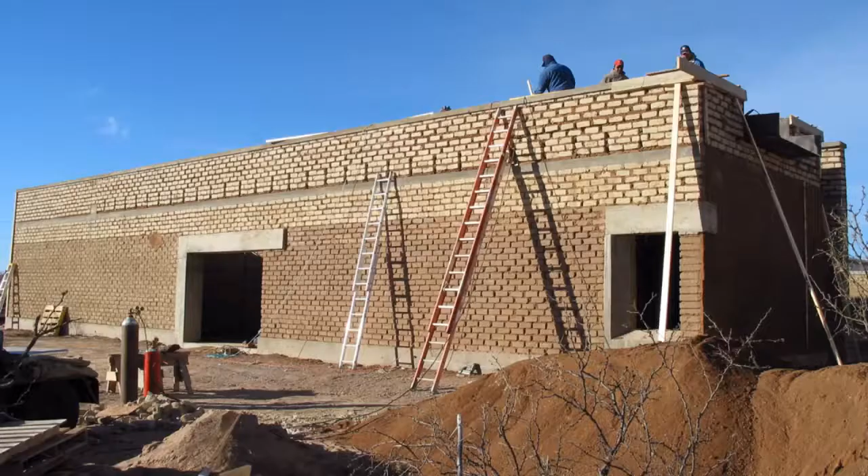For this house we made in Marfa, Texas, we employed these historic technologies and current building practices, weaving concrete and earth together, making architecture that takes building materials from New Mexico and from Mexico. The lower bricks are from New Mexico, the ones above from Ojinaga, Mexico, because they were lighter and less expensive, saving cost on the wall and not needing to bear such a structural load. Woven together so you can see the distinctions clearly between two building traditions, yet simultaneously unified.

Working in Marfa during that time, we also began to be exposed to the political conditions of working on the contemporary U.S.-Mexico border, a landscape that in many ways is a binary between the United States and Mexico, or Tejano and Anglo, or wealth and poverty.

We were approached to work on a project with two artists from Berlin, Elmgreen and Dragset, on a project that walked the line between all those juxtapositions and contrasts, called Prada Marfa. For us, that exposed another dimension of architectural possibility, one that is political.

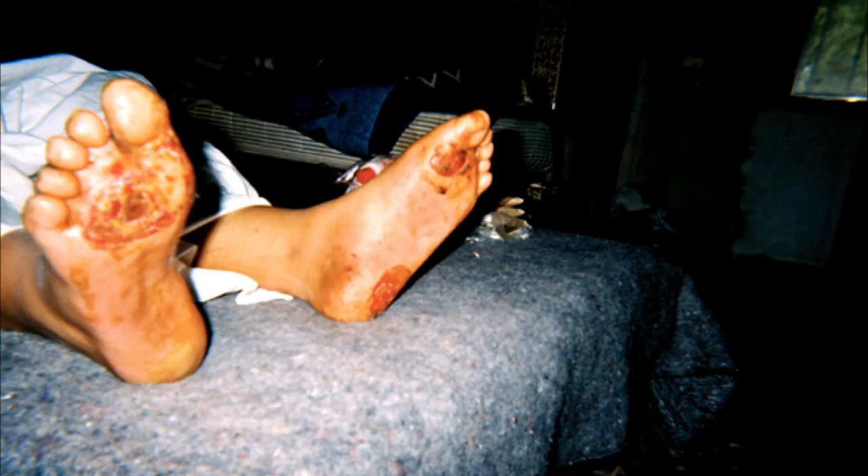What does it mean to build a building in a landscape, an architecture or installation that suggests a kind of venue recognized for selling some of the most expensive purses and shoes in the world, in a landscape where historic shoes were made out of the yucca plant, prevalent in the environment, in a context where people walk hundreds of miles until their shoes wear out, and have to stuff yucca in their shoes to keep going.

It's a project that draws from Andreas Gursky's photograph Prada as its facade. This is the building, Prada Marfa, built along a desolate road in the West Texas desert, holding the 2005 line of purses and shoes, not open to the public, but hermetically sealed as a kind of time capsule in the middle of the desert.

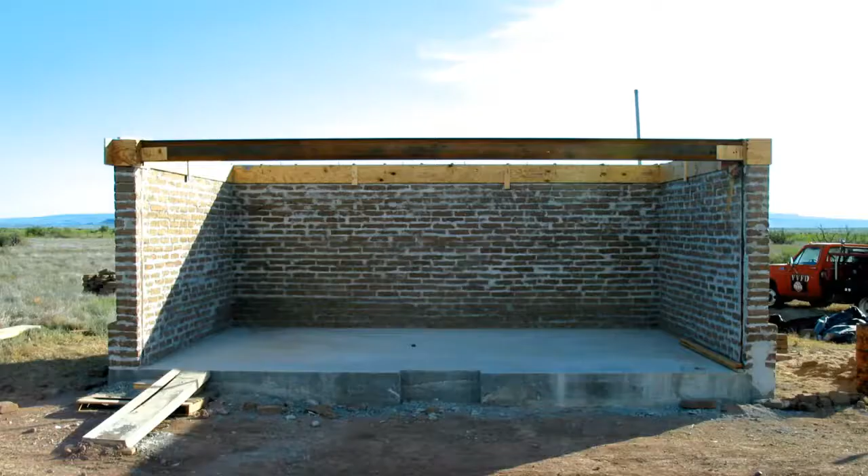But even in the construction of this building, we wanted to demonstrate these relationships and juxtapositions, because we felt this was a future object of archaeology, one that would be uncovered, and maybe archaeologists would discover within the building this tension between the very humble mud brick and cement mortar, and the dialogue between the two.

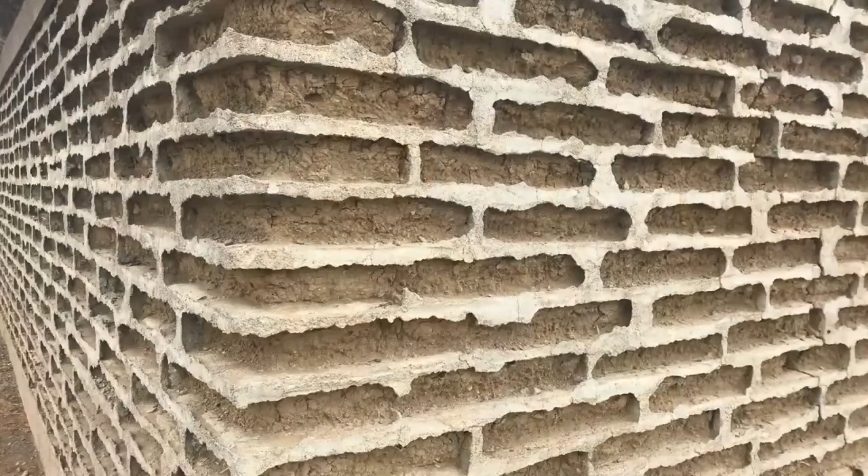The US military introduced this into the border because they were very accepting of the brick, but not so accepting of the mud mortar. You find that in the construction of the military forts built in Marfa as the base to protect the United States along the US-Mexico border, and later you see these same buildings housing Donald Judd's collection of minimalist work in Marfa.

So when Beyonce made this jump in front of Prada, it became the kind of signature thing you do in front of Prada Marfa if you ever visit there.

For me, the borderlands were both a context in which we found two things. That project was completed in 2005, and there was a heightening of security along the US-Mexico border at that time. In 2006, the Secure Fence Act was passed, which mandated 700 miles of wall between the United States and Mexico.

So what we found was these conditions of horror along the border, coupled simultaneously with conditions of humor. Horror stemming from the militarization of the border, from xenophobia, the struggles between poverty and immigration, and humor as a response to those hardships, and as a strategy to deal with the ridiculous nature of the border wall. This was what prompted our research and work on thinking about the conditions along the US-Mexico border and the construction of the wall.

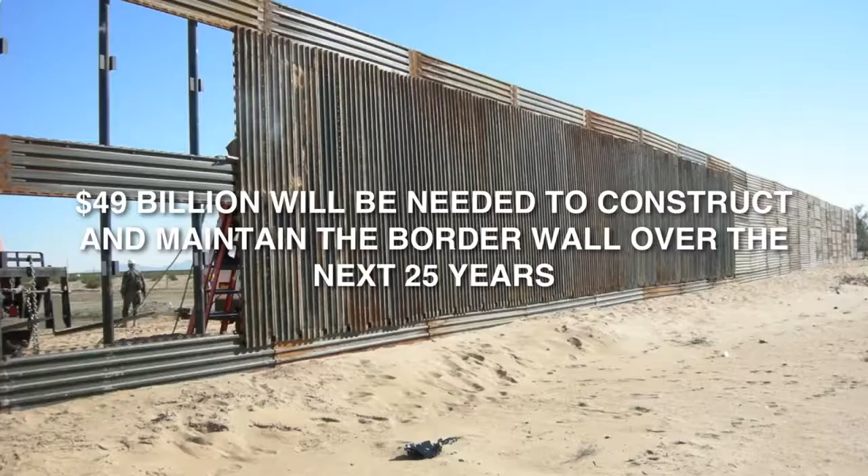In fact, this is one of the most expensive stretches of wall constructed over the dunes in California, called the floating fence. But $3.4 billion have been spent constructing this wall since 2006. And it's anticipated that $49 billion will be needed to construct and maintain this wall over the next 25 years.

Again, this is not Trump's wall, which he has only built a few feet of. This is the wall that was put in place by the Secure Fence Act by George Bush, and really the majority of which was constructed under the Obama administration.

I like to put that number, 49 billion, into an architectural context to think about what else that would buy. It could buy 300 Seattle public libraries, or 204 Disney concert halls, or 500 miles of the High Line. And put that into perspective when you think about the fact that there are 690 miles of wall built instead of 690 miles of High Line.

I don't mean to suggest that we should build a High Line there, but one could imagine the kind of cultural investment that would transform a region that is in need of infrastructure around water, education, social infrastructure.

In addition to that, since 1994, nearly 6,000 people have died trying to cross the border. And so the implications there are that the wall has pushed people further into the desert, and this is the outcome. Well, what does one do as an architect, and how does one participate?

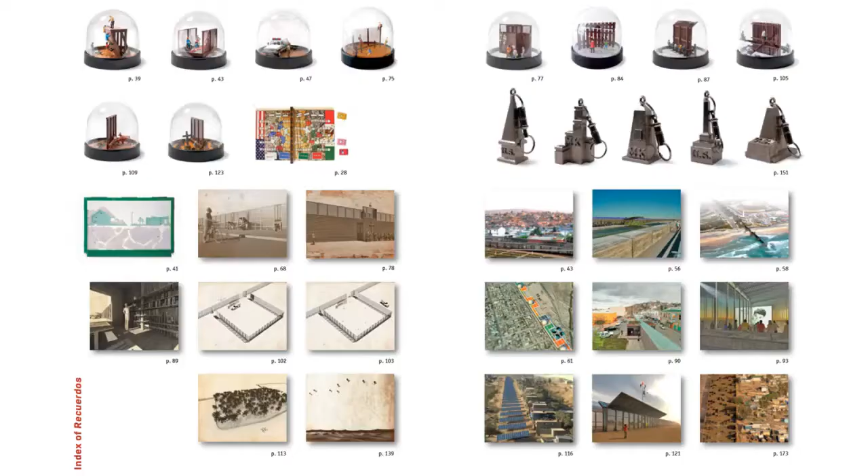We had no idea, but since that time, since 2004, we began drawing and making models and producing images that would help us memorialize in a way, or remember, or think about the problematics of the wall. And so these are just a few examples of them that we call recuerdos, or souvenirs, of a moment that we have to kind of remember what happened.

And so there's sort of a progression of thought for us around how we might think of the wall. In 2006, one way we thought about the wall was: what if we could do something instead of a wall? What would we do instead of a wall? Some of the drawings we produced were imagining, well, why aren't we investing in solar energy instead of investing in a wall, for example?

This is not to say that we should build a solar wall, but I think these drawings open up a conversation to lots of different possibilities, because this is the region that is the most fertile for harnessing solar energy.

Or what if we can create wastewater treatment plants in landscapes where we have some of the most polluted rivers in the United States and Mexico?

Later on, without the ability to stop the wall's construction, what do we do since there already is a wall in place? And this has been a question that is sometimes controversial, but if there is a wall, does one participate in thinking about construction in and around and on and the wall itself?

So we produce drawings of life safety beacons that should be constructed to prevent deaths, that store water, that clean water, that alert border patrol so that they can possibly save lives, thinking about transforming the really uninhabitable zone between El Paso and Juarez as a place that is an urban park on both sides of that wall that has been in place for a very long time, even prior to the Secure Fence Act.

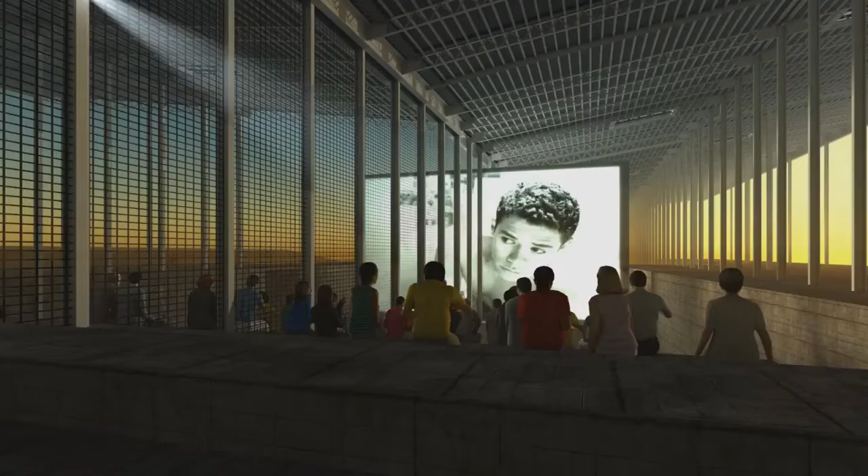To think about the kinds of social infrastructures that could be constructed in those landscapes - binational theaters, for example, or a binational library where the wall is converted into a bookshelf where ideas can be exchanged.

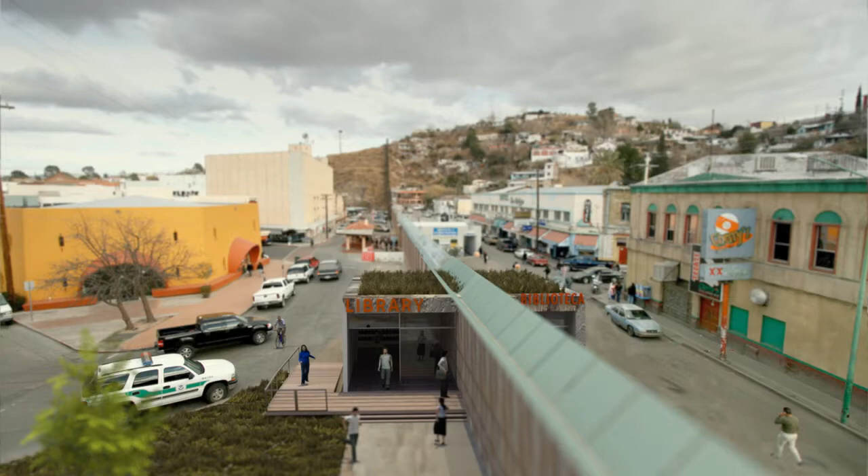And all of these images really come from stories that were already occurring on that border, or in some cases inspired by other borders. In this case, there's actually a binational library on the Canadian-US border joined with an opera house. I think it's called the only library in the US without books, because all the book stacks are in Canada and the reading area is in the United States, or vice versa.

Can we create clean water by harvesting fog, for example? Can we begin to ask questions about the wall serving as a vehicle for pedestrian and bicycle traffic east and west, since it serves as a barrier between traffic north and south?

These are meant, in a way, to just ask questions about the possibility of what could happen. And I think they led to sketches and drawings that were really acts of resistance by pointing out the ridiculous nature of the wall itself.

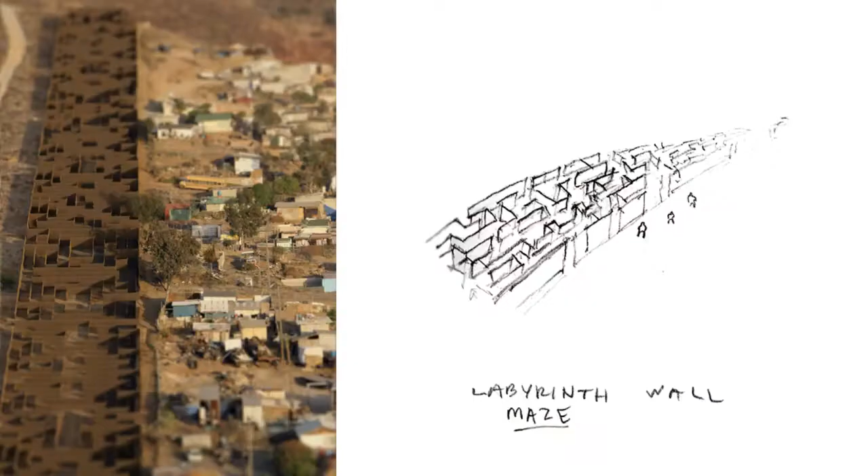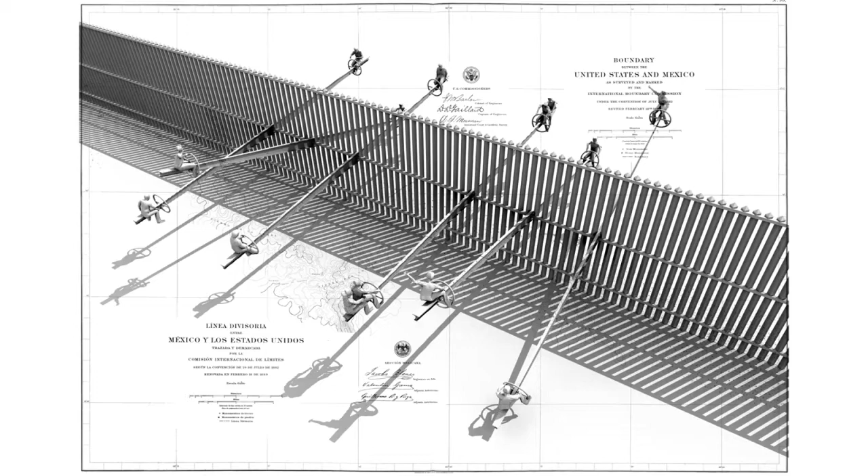Or a labyrinth that really speaks about the enormous complexities that are producing this wall. Or a teeter-totter that speaks to the notion that really what we do on one side has consequences on the other side, and there's a synergy between both countries and the people who live there, and the border is actually this enormous fulcrum where we share these kinds of commonalities.

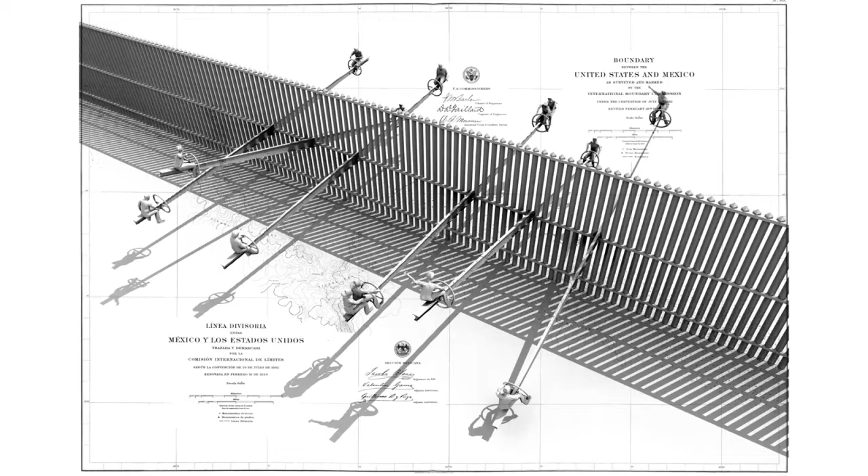Or in this case, a confessional where the priest actually goes to the other side and the confessor enters and goes into the other side, but they're still bound by the wall itself. So the first confession of the sin is that they both crossed the border illegally.

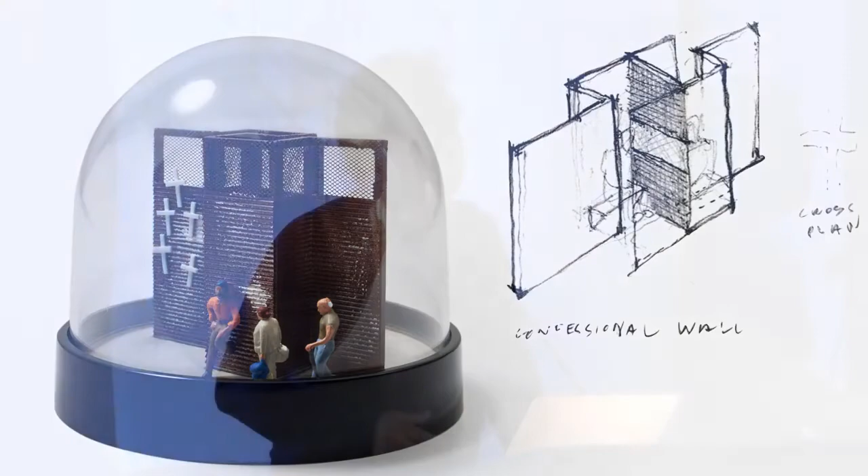So these are the stories that exist in this book, Border Wall as Architecture. And these are the products and objects from that exploration that tell the histories. So just to briefly tell a few of the stories that accompany them.

About the origins of the oldest sport in the world played with a rubber ball, where players from each side keep the ball in the air, hitting it with their hips and sending it across an imaginary line in the sand - a very violent game where people actually die because the ball is so heavy.

And relating that to the playing of volleyball, a binational game that's been played since the 70s to celebrate binational identities and people coming together. So the wall in many ways has served as a vehicle to bring people together despite its intent to separate people.

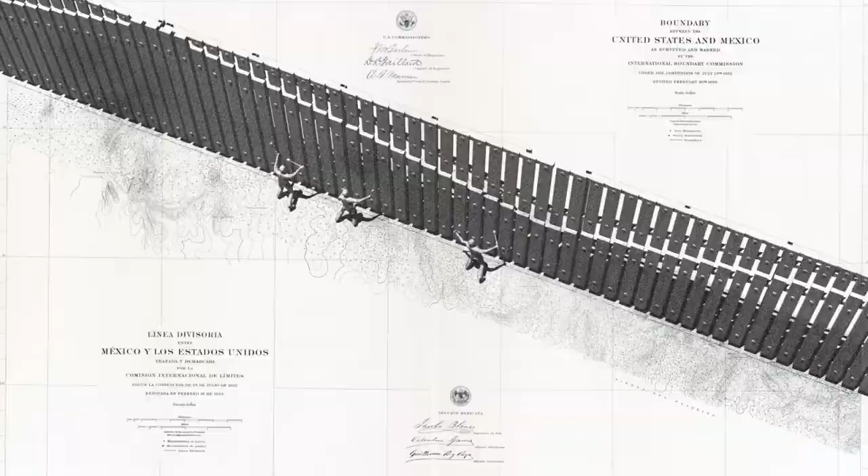And here, imagining constructing xylophones on the wall instead of constructing walls - this memorializes my friend Glenn Weyant, a musician who picks up sticks or mallets and plays the wall. He calls them weapons of mass percussion, referencing the weapons of mass destruction that propagated the construction of the wall in the first place. Sometimes he actually gets Border Patrol to play along with him in his recordings.

On one side of the wall, it may look like this: someone mowing their lawn in a domestic environment in the United States. And on the other side, the wall is sometimes used as the fourth wall of a house. We produced a series of drawings looking at this system, revealing the construction systems on one side versus another, and the size of spaces.

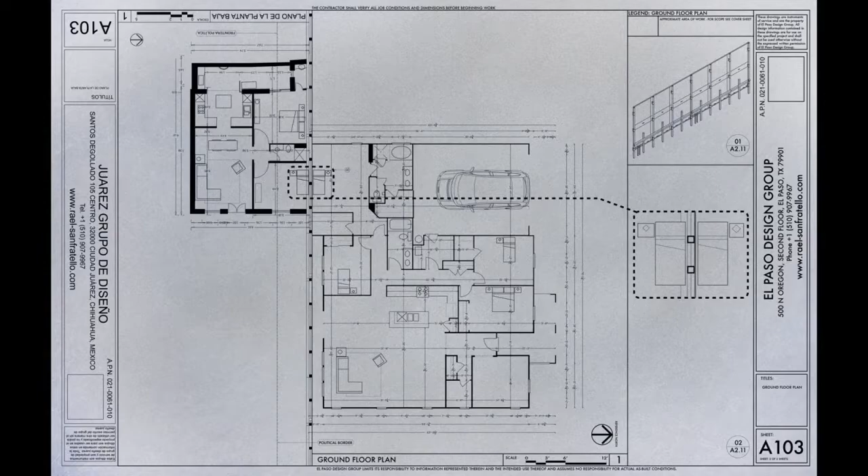So that's the typical size of a house in Juarez. This is the typical size of a house in El Paso. We imagined this as a single house divided, in this case dividing the bed. But these kinds of construction methods - transforming wood frame on one side, or adobe or concrete block on another - are something that has always interested me and fueled a way of thinking about making.

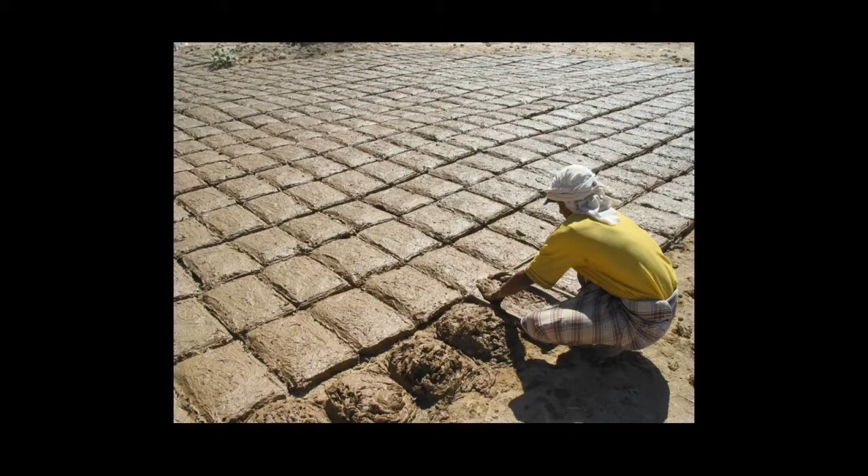And so it also gave birth to a way of thinking about 3D printing. I gave a workshop on 3D printing today. And while this may seem like a strange transition, I want to point out that these were both research endeavors that kind of came from the same mother, in a way - to think about how we could maybe make buildings using the most humble and fundamental building component, which is a brick.

And how, if we use that technology to make a brick, how we might be able to make architecture for the 21st century, thinking about craft, but also about material origins. And thinking about how we wouldn't maybe make a printer that's larger than a building, but we would use a number of printers as a farm to make lots of parts that people could very easily assemble together to make complex objects that reflect a complexity of culture. And so some of the things that we think about...

Let me back up a second. Some of the things that we're working on is that we're inventing materials for 3D printing that are ecological, and I'll talk about that in a second. Developing software and hardware, we're testing assembly methods that don't require specialized skill. And we think about how to connect pre-industrial, industrial, and digital craft technologies.

There's a word that I wanted to share, and it's a fundamental concept called rascuache. The notion of this word is that you do the best possible you can with whatever you have available, with the least available. It's a word that Chicanos use often to describe, if you've ever been to a Mexican restaurant, for example, and they have a salt shaker made out of a beer bottle—like that was really smart. It holds a lot of salt. You can use it. And there's a pride associated with that, a pride being able to do the most with the least.

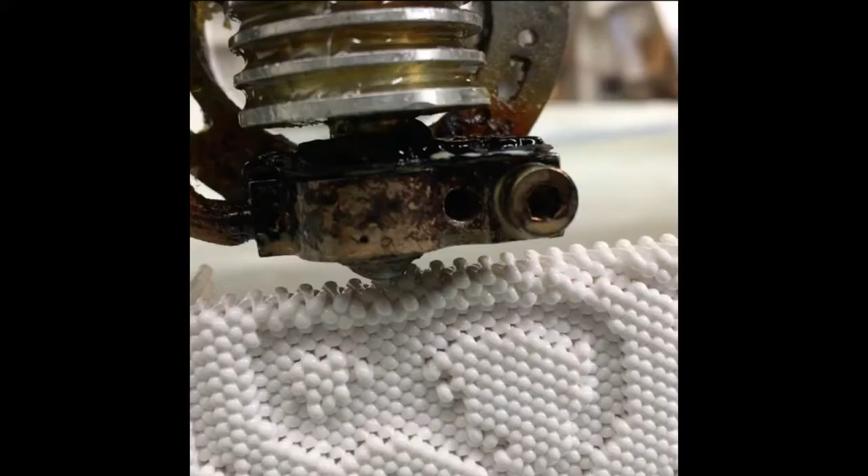And we're also thinking about the ways that the machines behave so that we can control—oops, maybe I'll lower that, I don't know if I can lower that anymore—but we control the application of material in very specific ways. So we can make structural areas that are thick, or ornamental areas, or we can integrate the two and make objects sort of like that.

But plastic isn't our goal. We wanted to think about materials that were alternative, or rascuache materials in a way, materials that we could find in the landscape. And you can see some of those upstairs. Upstairs we have objects made out of curry, out of tea, out of coffee, and out of cotton candy.

And you can see and smell those objects, but we also made objects out of sawdust, thinking about the 7 million tons of sawdust that are produced every year in the United States from the construction industry. Salt, which is—there's hundreds of thousands of tons produced in the South Bay using only wind and sun. And this is something we call the Saltygloo, because it's made out of salt and glue.

Also ways to think about using cement, but using cement with very little water and very lightweight, that's fiber reinforced to make very large objects using a 3D printer. And so we've worked on developing materials for a very long time to sort of hack 3D printers. In a way, rascuache actually means to hack, maybe, to hack with pride, I guess.

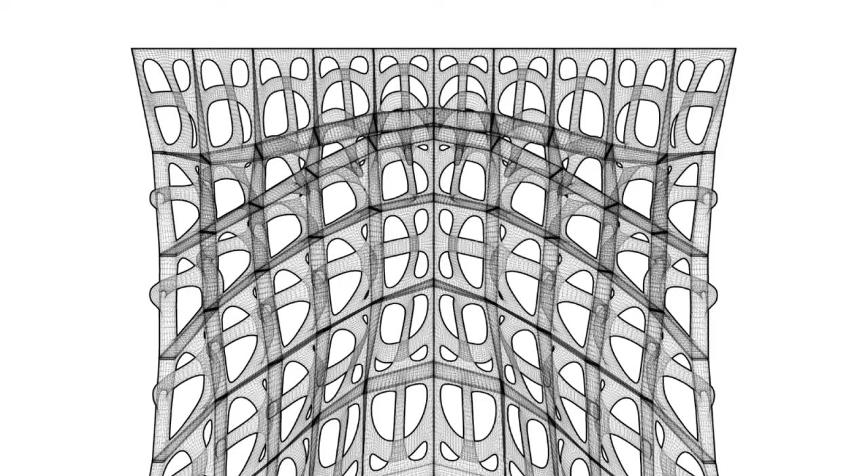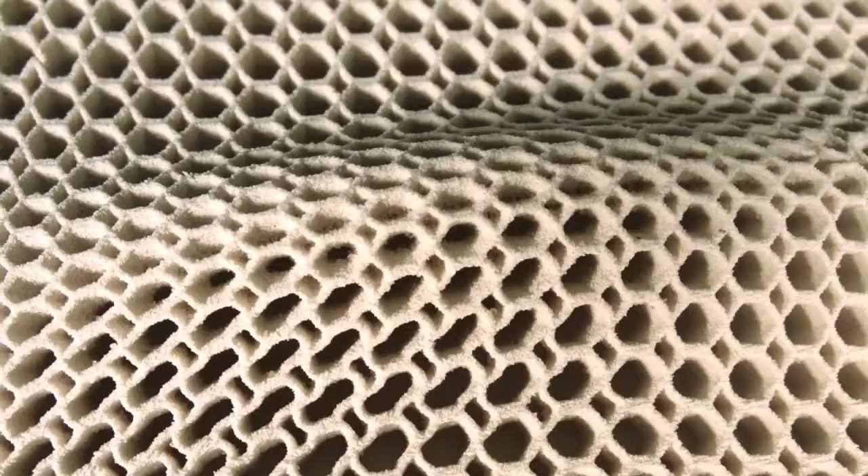And how could 30,000 years of additive manufacturing by hand, by humans, transform into a contemporary practice of ceramics? These are some of our earliest pieces from 2009, when we first embarked on 3D printing clay and realized we could put them in the kiln and fire them. What does it mean for these objects to last another 100,000 years when archaeologists find them in the future? What kind of meaning could we embed in them, and what meaning do they have implicit in their materials itself? And what would we make with that?

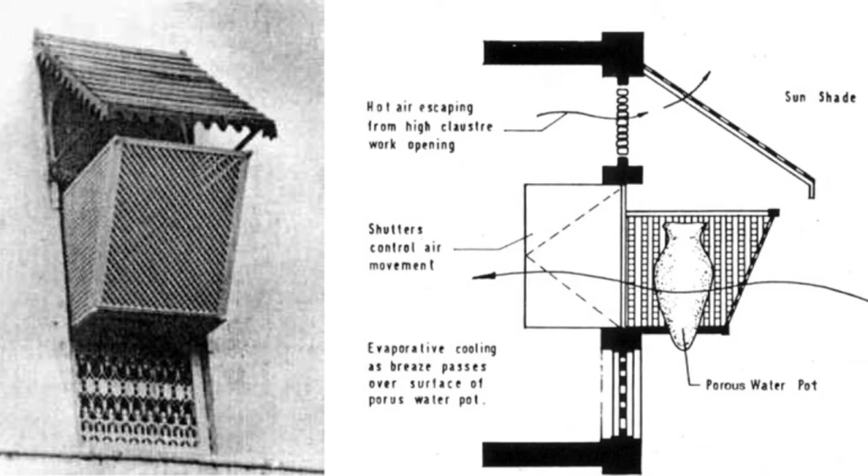Would we make bricks that insert themselves into traditional brick systems and could hold water or plants? Could we embed air pockets and make insulative bricks in some way? Would we look at past traditions like traditional evaporative coolers, where you'd set an enormous porous ceramic vessel in a window in an arid climate, and when the arid air passed over it, it would humidify the air?

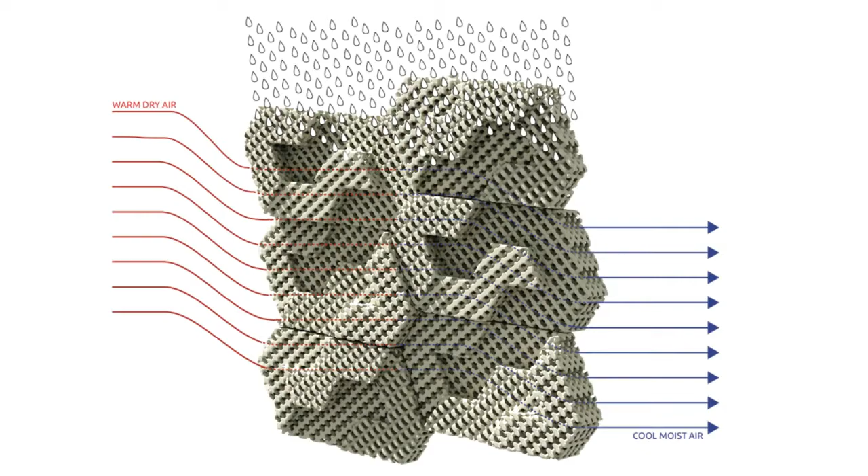It would enter the space and lower the temperature of the room on the interior of the building. So we took that technology and tried to encompass it in the making of a single brick, a brick that had two levels of porosity: a micro porosity we could calibrate with the material system and the 3D printer so it sucks up water like a sponge and holds it, but also another level of porosity where air could pass through and thus humidify rooms.

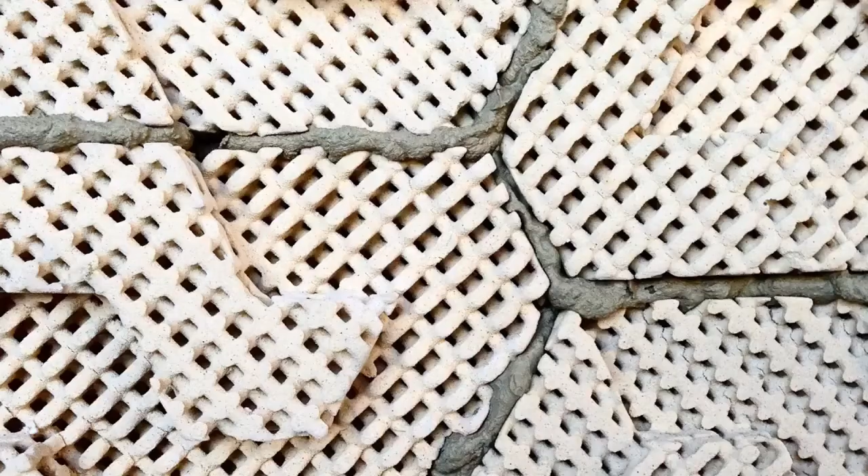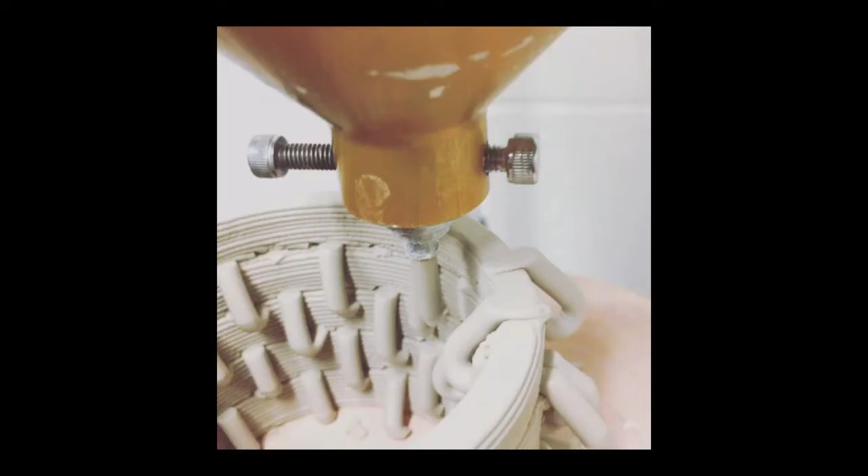Some of the machine behaviors we explored on clay allowed us to make things we never thought we would make. Objects like this, where it's just pinching off each layer of clay as it goes around, so it's kind of like a cactus or something. Or objects like this, which I don't know what this is, but it's just drooping and falling.

The outcomes were just design research with no intent on any kind of function necessarily or purpose, but ways of exploring and investigating the relationship between the material, the machine, and gravity. These are some of the outcomes, sort of pushing the limits of what's possible in terms of texture.

And we saved every single experiment we made just as a matter of habit, arriving at a body of knowledge that would allow us to further explore these in the making of architectural applications—in this case, thinking about how we can make wall cladding systems. These were a number of early explorations in ceramic wall cladding systems, using only clay, water, and fire to produce a building skin that could potentially last a lifetime and beyond.

We also began to think about how we might consider the blending of materials. That was actually prompted by our president, because I was working in Juarez one day when our president announced there were a lot of bad hombres at the border. And I thought, oh, that's really interesting—there's bad hombres at the border.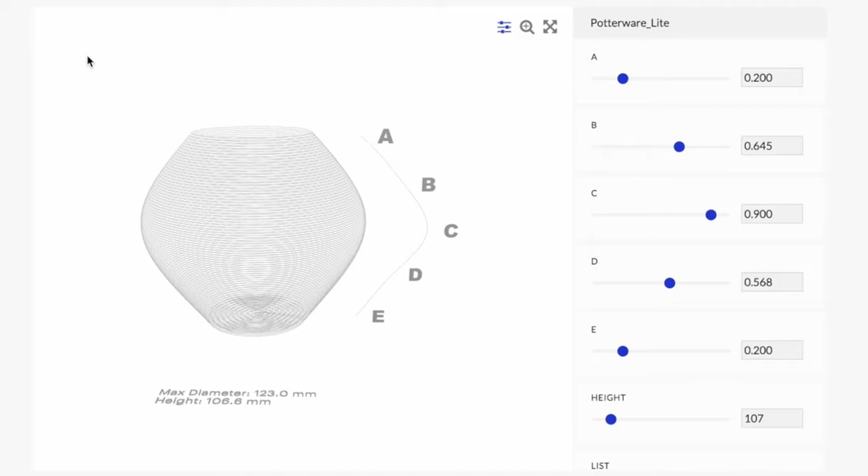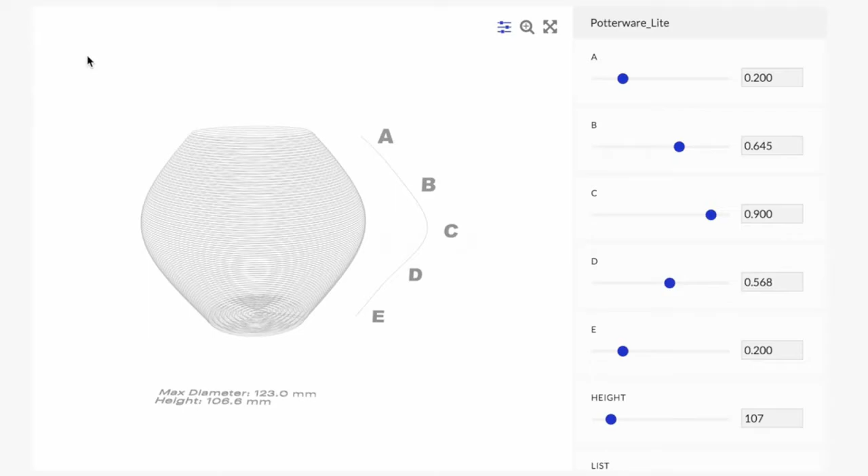That software, which we call Potterware, is designed for making pots. But really, the underlying basis for the production of this software was so that we could control a machine, because we also realized we had to make a machine. And we made a machine that could do a number of things—one, it could produce a bunch of pots.

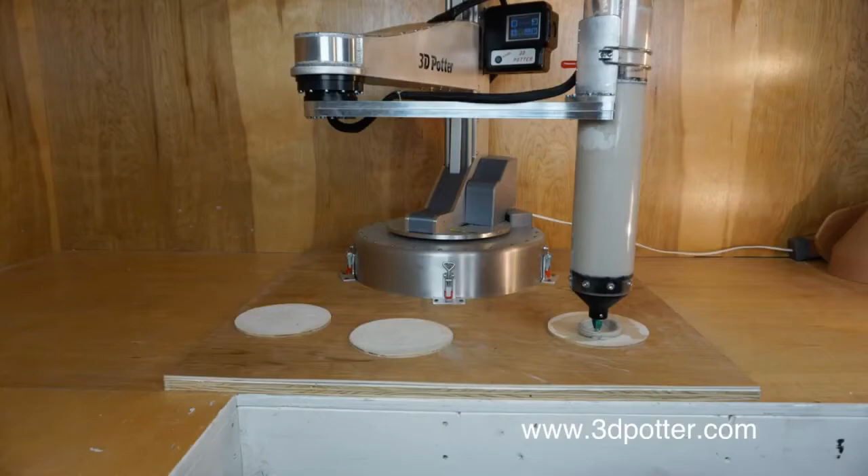So all of a sudden, we moved into a world where we could make hundreds of objects with a single machine. But that very same machine became a machine where we realized we can make really big things. And so the idea of this particular machine, in contrast to many who are making machines to produce architecture, is that their machines are often bigger than the architecture it makes, just like a 3D printer. But ours was intended to be smaller, that you could print a room, for example.

And so we also had to think about how we could have a continuous delivery of materials, so it's in a tube. But a year and a half ago, this is where we were. This is a human 3D printer. And so we're just trying to push clay, and that's that.

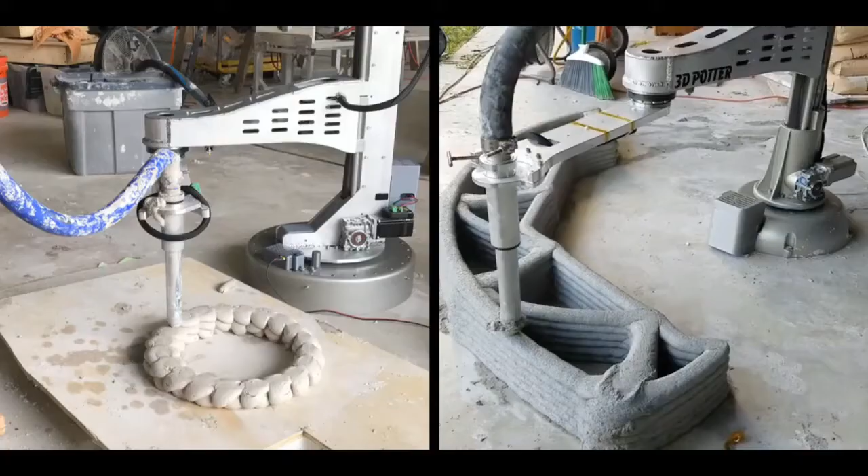But as of just a few weeks ago, here's where we have arrived. We've arrived in a place where we are now able to just shovel in as much material as we want. In this case, adobe - clay, straw, and water - into the machines, and so we've scaled up. So fundamentally, this machine can print a room.

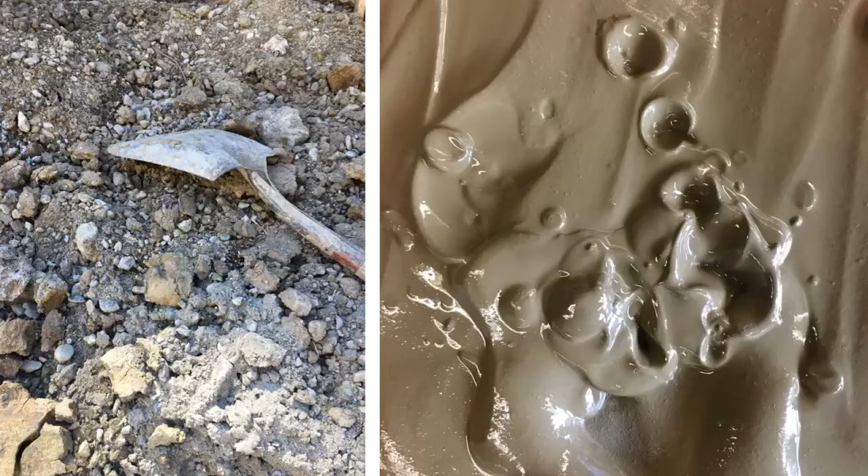And so we're imagining not only how this technology might be able to make architectural components that are at the scale of architecture, or environments, or rooms, or buildings, or structures, but we also have to think about where does that material come from. And so we've been doing a number of tests of how we can take the soil beneath our feet and convert it into a material that can be used in architecture.

And so we've been doing that at the scale of pottery or earthenware, where we've just dug clay from the ground. And we've done that both in California, but also we were invited to India to do the same thing, where Google had designed this application where people coming to the museum in Mumbai could write down the most important thing they thought, the important word they thought that should be remembered in 100 years.

And then we worked with pretty much the most famous potter in India who harvested local clay and made this clay for us. That's him in the front, that's me in the back.

And we produced a series of objects that reflected hundreds of thousands of visitors coming into the museum and saying the words that we should remember in 100 years are things like a book, or mobile phone, or plastic, or computer. And at the end of the workshop, after about 10,000 students came through our workshop, 3D printer was one of the words that was the top 10 word of the day.

And they're written in 2 languages on the single vessel. So this is before it's fired, and this is after it's fired and glazed. And it says book on one side, and it says book on the other side in Hindi. And so here are some of the examples of those objects that will be on exhibit in 100 years at the museum in Mumbai. If anyone's around, I encourage you to stop by.

This particular material is a plastic made out of corn, and then we covered it in mud, and this is the outcome. And so that same research that we didn't know what to do with, that wiggly research, gives this its structure. And it's also led us to some other experiments like this.

Which is now we're beginning to work with scientists to create artificial bird habitat off the coast of San Francisco on an island called Año Nuevo Island. Año Nuevo has a bird called Cassin's auklet, and they can no longer find nesting areas because of sea level rise. And so we're producing these artificial environments that are basically birds' nests, and the birds' nests have an entrance where they can come in.

The bird lays its chicks there, and the chicks are really annoying and noisy, so the bird has to be on the other side of the wall. It usually finds that in nature, but it can't find that here. There's a little peekaboo area for the chicks so they can look out in the world, making sure there's no ravens or other animals that will eat them before they can exit and go out.

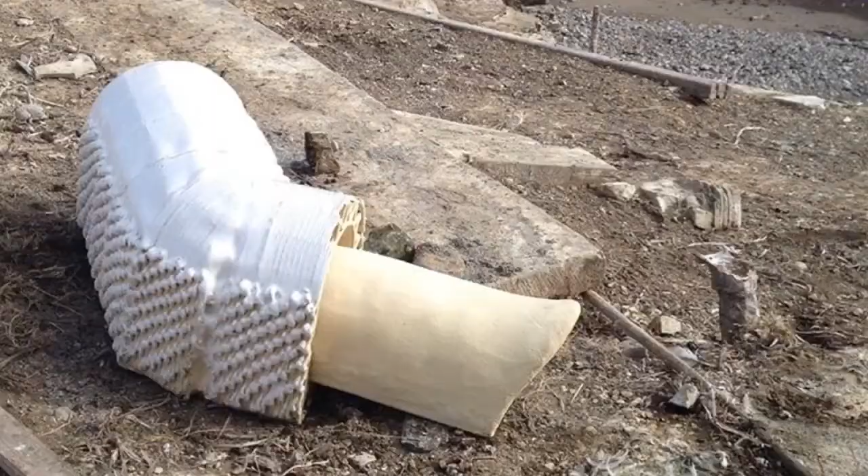It uses this technology we didn't know what to do with, which has micro shading devices that were really important to keep the nest cool, and a double wall so air can actually escape, making it ventilated. We took them out to Año Nuevo last year and deployed them, so the first version is being tested already, and now we're working on the second version, which has a raven-proof lid.

That's a raven-proof lid, if you didn't know that.

A couple other things. Some scientists came into our studio and saw all this stuff made out of coffee and car tire rubber and cotton candy, and they said, can you print calcium carbonate? Because calcium carbonate is what corals and coral reefs produce.

They didn't want to create coral reef restoration as a project, but to demonstrate that higher acidity levels in the ocean actually dissolve coral and coral reef, decimating that habitat. So we printed out of calcium carbonate these objects that they're now using to teach the fact that these higher acidity levels destroy coral.

These are scanned coral from an organization called the Hydrous that goes around the world scanning coral. But then they saw those crazy objects with all the loops and said, wow, that would be a perfect environment for coral to grow in. Ceramic actually happens to be one of the best materials for coral to grow in an artificial environment.

Over the summer we worked with them for about two months, and then went into production of 4,000 of these seed pods. This is one example, and here's another example of these shapes, both 3D printed out of ceramic using different techniques. Scientists are using them in test pools in the ocean in Baja California, Australia, and Guam, and they're working. The coral are attaching to them, and it's pretty exciting to see these environments being tested in nature.

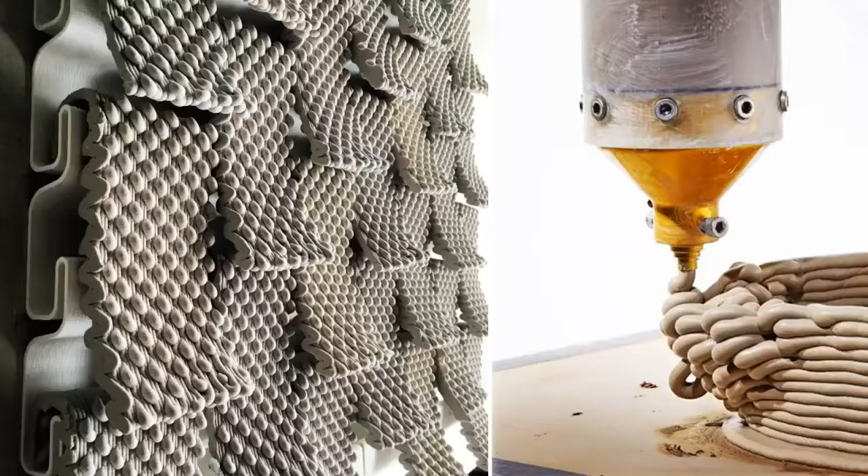And thinking about, well, what's that building system like as a 3D printed building system? What do they hang on? Do they hang on a 3D printed wall backing?

We also at one point did a project using Chardonnay grape skins, and you can see some 3D printed Chardonnay cups made out of Chardonnay grape skins upstairs. But we made this facade out of Chardonnay grape skins and sawdust and cement, and it holds succulents that do well in the Northern California climate.

This is really a test bed for us to test our materials outside, their longevity, how well they work in the sun.

This little cabin of curiosities is nestled in a backyard that's a response to the relaxation of zoning in the East Bay, because I don't know if you're aware, but San Francisco has now surpassed New York as the most expensive place to live in the United States.

This relaxation allows people to build up to 1,200 square feet without going to the planning department or employing an architect, making these secondary living units in the backyard. We did this in response to that condition as a realm for experimentation. So this is the 3D printed cabin of curiosities.

The interior has a translucent 3D printed skin that is backlit with LEDs, so the colors can actually be set to a mood. You can see what it looks like in the interior.

Almost everything is 3D printed, the furniture, the coffee table. You can actually see the coffee—what's upstairs is on the coffee table right there. Whoops, I think it's a copy.

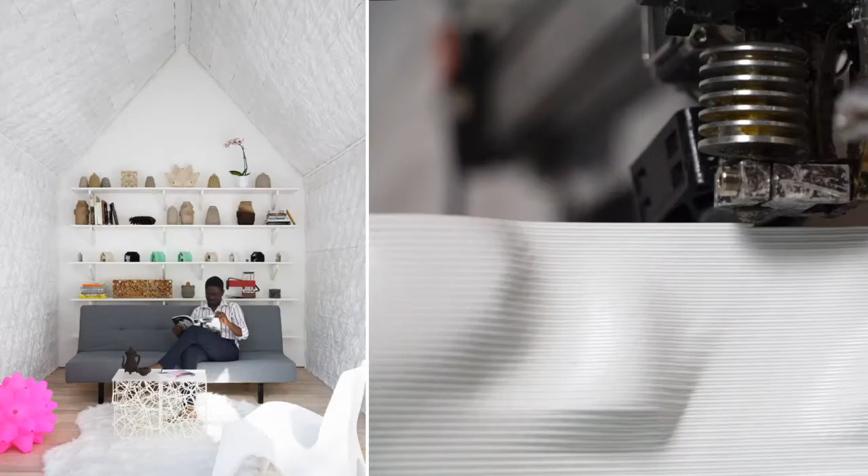So the Chardonnay cups, the coffee pot and coffee cup, using that same kind of software technology that we're working on. This is the interior at night, backlit, not with a color but with pure white, and it transforms into a sleeping area as well.

And it kind of sets the mood of the house right before one goes to bed. I like to sum up with this slide, and I think it sums it up best, because I often think that rather than seeing building with earth and clay and 3D printing as two sides of a technological spectrum, I'm interested in bringing them together. My goal is to think about how we can make work that bridges the borders between art and science and architecture and culture and politics, with implications in craft and sustainability. And I think one way of looking towards the future is actually looking at the past and seeing what we've done. So thank you.